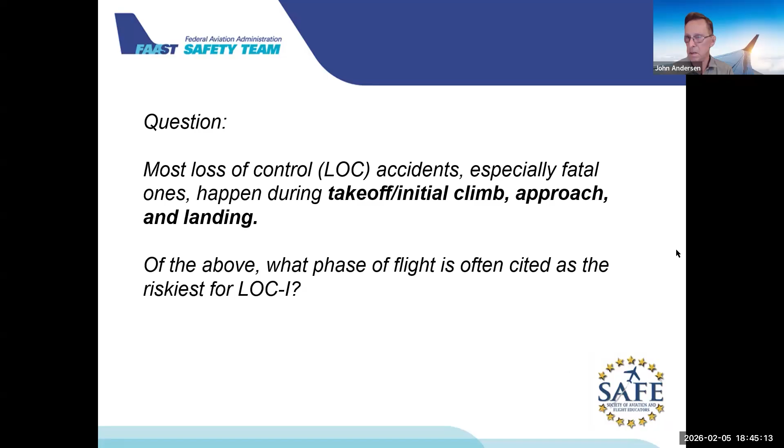Most loss of control accidents, especially fatal ones, happen during takeoff and initial climb, with takeoff climb being cited as the riskiest. So pretty much I see takeoff, initial climb. So pretty much everybody's kind of in line with that. And that's, of course, what happened with that particular King Air incident and most of them that have occurred.

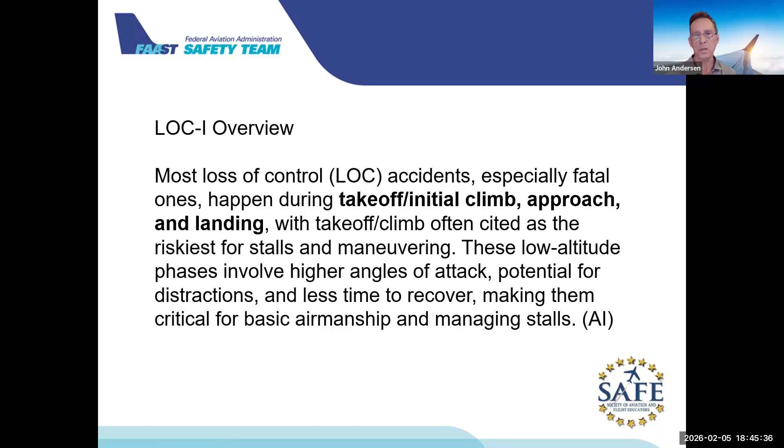So this is from the original Joint Steering Committee. This is data about LOCI. It's pretty neat information when you have a lot of time to look at it down the road. But basically, most loss of control accidents, obviously we have about 1200. Now remember that this is fatal accidents. This is not all accidents. This is just fatal. But the preponderance obviously are non-home built.

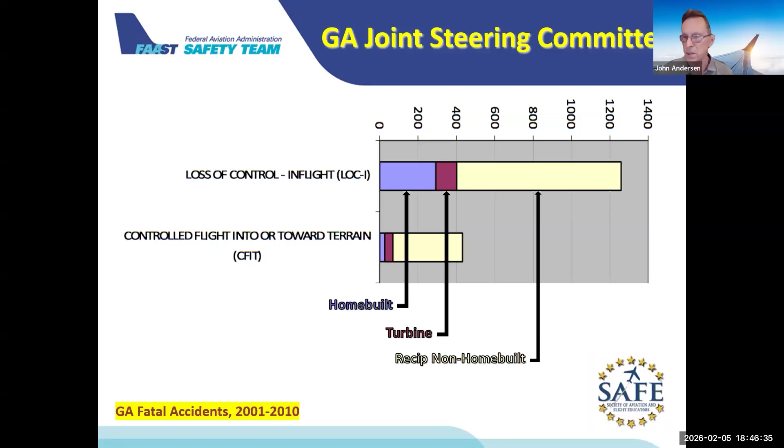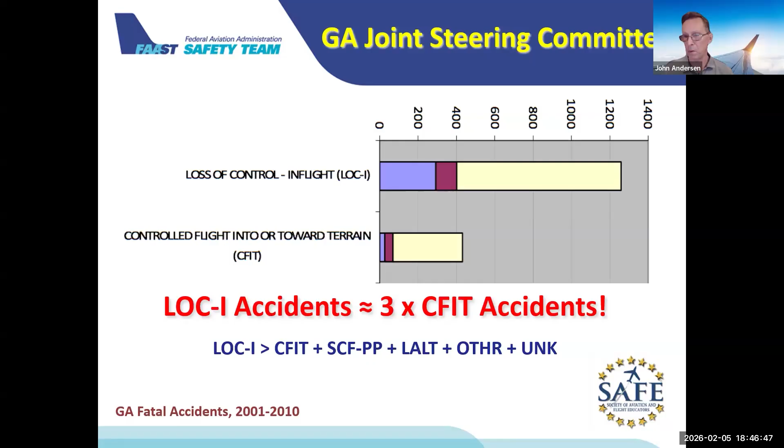The home built are a percentage, and it's interesting, but turbine are in there too, because that's general aviation, so they're included in that. When you look at that compared with CFIT, I mean, it's 3 times what we get with CFIT. And that's from 2001 to 2010. So that data is a little bit old. I have newer data, it hasn't changed much. It's still basically the same percentages. LOCI is 3 times the CFIT accidents. It's greater than really CFIT, I mean, all of the rest combined.

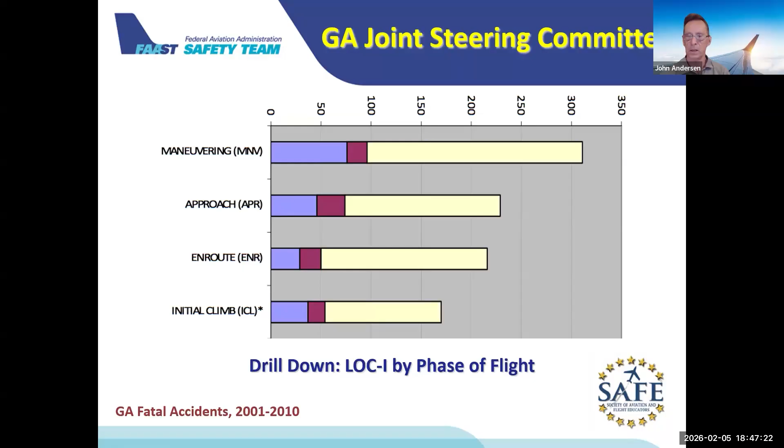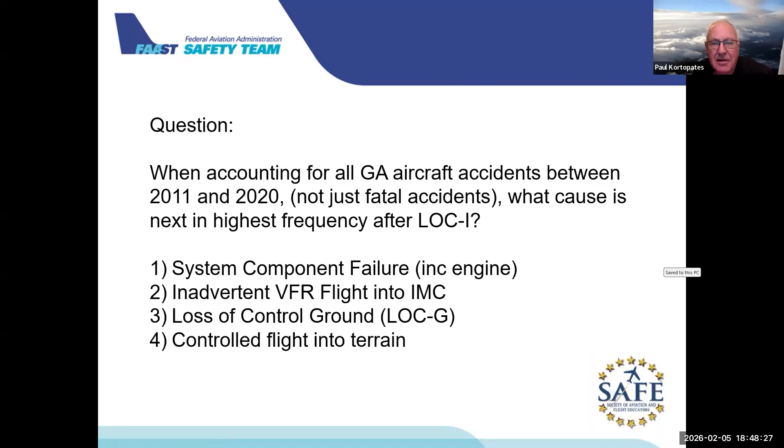So here is the 2011 to 2020 all GA aircraft accidents by defining event from the NTSB. Loss of control is still number one. It's also almost 50% fatal. The number two is loss of control on ground, which is kind of a head scratcher for me. But I guess they separate whether or not this is a landing or takeoff incident. The next one is system or component failure, power plant or whatever have you. Then there's abnormal runway contact. Then you come down to fuel related. Then there's system component non-power plant, controlled flight into terrain, and so on.

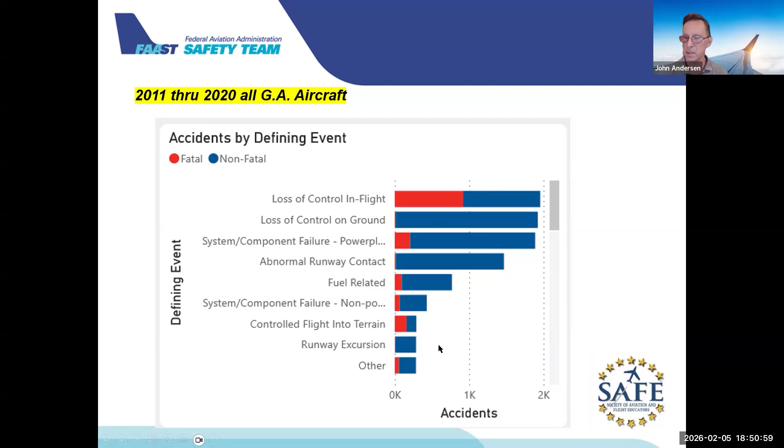So you can see loss of control in flight, that's the highest fatality period there is. But from a percentage standpoint, if you just look down, controlled flight into terrain by percentage of incidents is the highest fatality rate in terms of percentages, but obviously not in numbers. So LOC, that's a big problem, along with LOC ground. Thank goodness it doesn't tend to be fatal. All right.

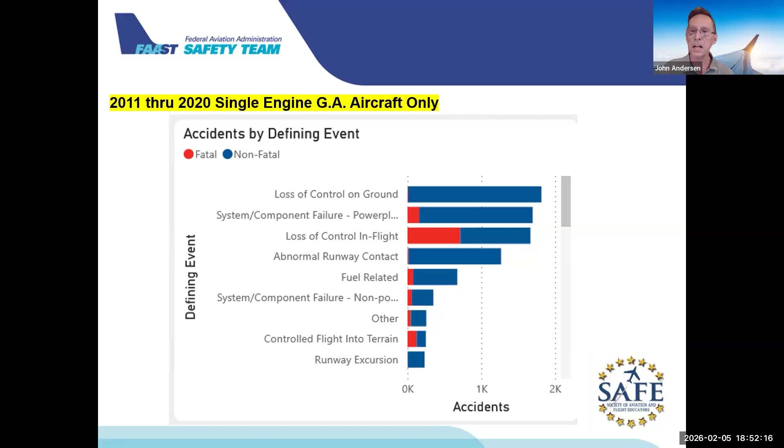John, we got a couple of questions. Maybe now would be a good time. Can you handle that? Can you put those guys on here? I can read them to you. They're in the chat. Oh, here we go.

The most recent question is: are inadvertent IMC embedded in the loss of control in flight numbers? That is a great question. I suspect it might be. I don't know—LOC, yeah, that would be VFR flight into IMC.

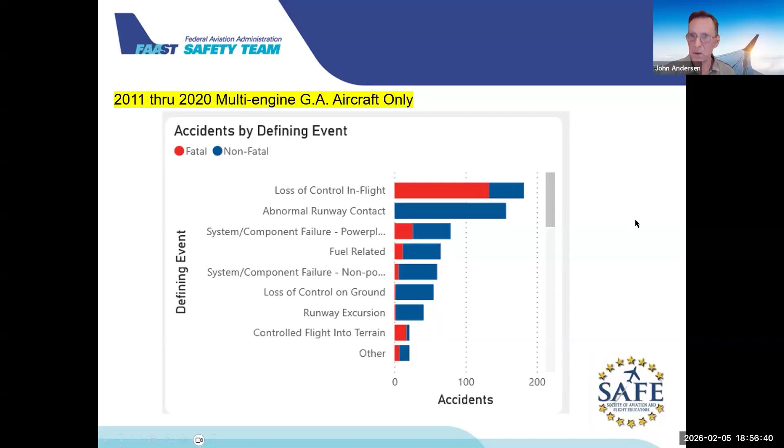Anyway, so that's multi-engine, so we obviously have an issue there. We got another question—okay, slide 16, I think. So we're talking flight training now. We're not talking GA, not talking any of that, us going out—we're just talking flight training. What is the number one risk during flight training?

Hey, we got a quarter of the folks have answered... okay, a little more than half now... two-thirds.

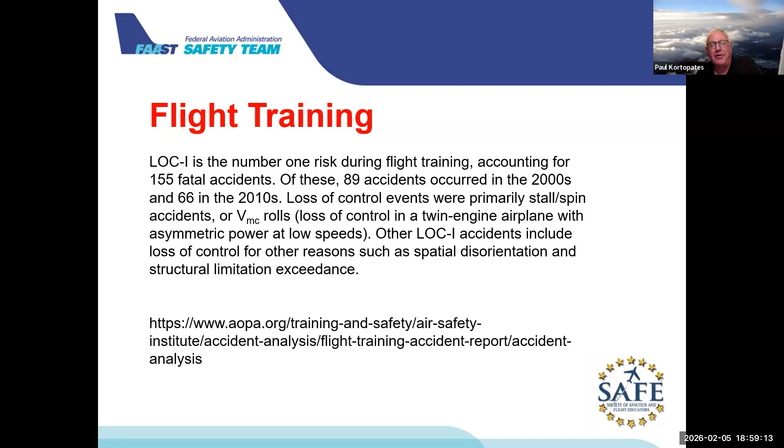Oh, BC says the biggest risk is running out of money. And the second largest is needing to use the restroom during the flight. As a King Air guy, I have to agree with that — getting into that thing is crazy tight, and you don't even want to get up during a flight. That's funny, whoever put that, I sympathize. I hope somebody didn't have a mechanical failure earlier in their training that's got them worried about that being the number one issue. But yeah, I'll stop sharing that.

AOPA Air Safety had some neat stuff here — LOCI categories, fatal flight training report 2000 to 2019. This is a 20-year look, and obviously stall spin is really number one. It's a VMC roll — there were 12 incidents, and other was 21, for a total of 155.

When we get to talking a little bit about prevention, I'm going to ask a couple things here, people, because I just know that in my day — I don't want to sound like somebody's dad — but in my day I'd take a 150 up and spin that thing down from 6,000 feet to 2,000, go up again and spin it down, go up again. I'd take people for a ride, I'd say 'you want to go first? Down.' I never understood it being a big issue, and I was never even close in the pattern. Never. I don't get it, but it's an issue.

Another question — okay, this would be slide 19. Yep, okay, it's launched there.

So we're going to drill into a little more detail. Of those 155 LOCI fatal accidents, what topics were 25 or more accidents? Emergency, maneuvering, takeoff, go, or all the above?

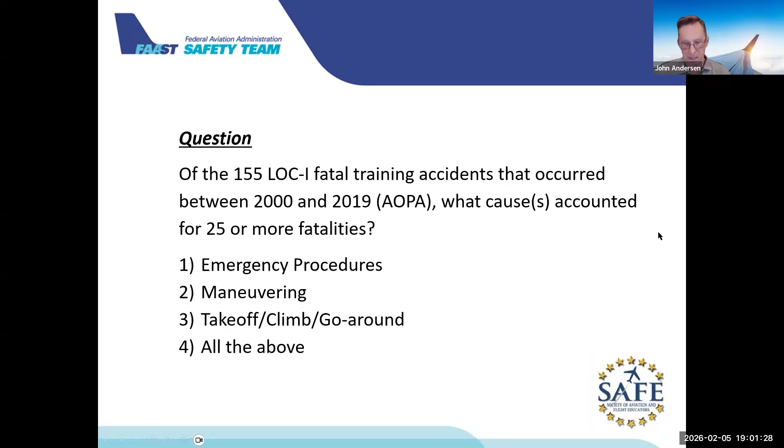Let's see if we can — there's the chart from AOPA for the 20-year period. Basically, all of the above — they're all a problem, with takeoff and climb being the preponderance at 48. But look at maneuvering, 45, emergency procedures, 26.

Oh yeah, man, we still have stall spin issues. So it looks to me, it's interesting — intentional stall spin is only 12, and then downwind base. I'm going to be curious what some of you say about that, here in just a bit.

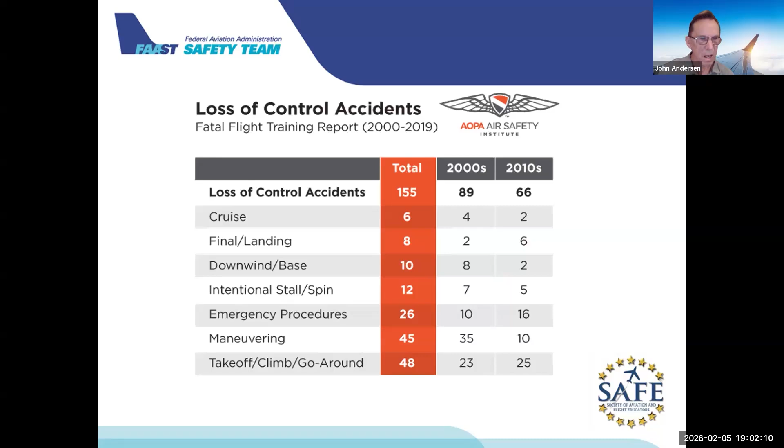Okay, this is the loss of control working group. This is what they came up with in '14 — the concerns that, because their job is to mitigate this, that's what we're trying to do here.

And I'm going to tell you what I do with multi-engine training, and I want to hear what everybody here is doing if they have any neat techniques. But first we're going to talk about transition training — the working group felt we needed more thorough transition training, and type clubs.

Stabilized approaches and landings need strengthening. Risk-based flight reviews — I take that to mean defined performance and getting through them, maybe a little more scrutiny.

Single pilot CRM, that's an interesting one — we'll hit on it, and I'm curious what everybody says. Aeronautical decision making is obviously a big, big deal. And angle of attack systems is interesting.

So when we get to that, I have something I've added in, because Beechcraft, for example, is very keen on the fact that a lot of their airplanes wind up in VMC loss of control in flight. They will never tell you what they're doing — they just make subtle changes, there's just too much liability, whatever. So they make subtle changes directed at trying to mitigate that. And we'll cover that. So here we go.

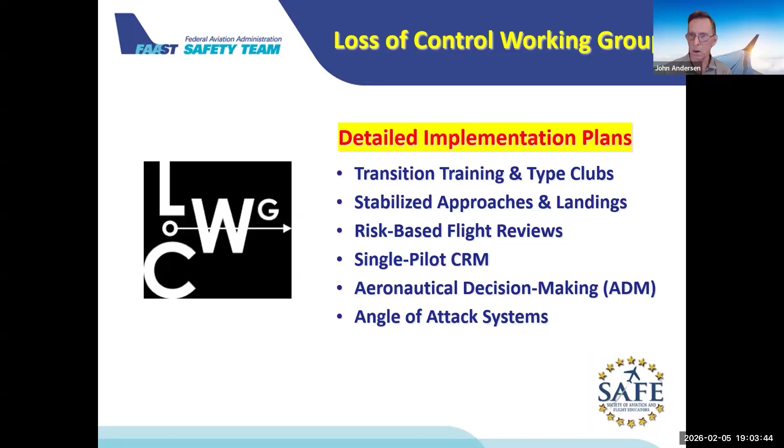I've flown with Andy and he's really good. In fact, I think Andy, you were the guy that helped me, quite a few years ago, back when you were the chief CFI, when I foolishly let my flight instructor rating lapse and had to get a check ride. Don't ever do that. That is the hardest thing, the hardest rating in the world. Anyway, Andy got me tuned up for that.

Andy, is there a way you can jump in here? Before we go through all these points, can you give the group your thoughts from a standpoint of a philosophy of Prevectus with your instructors in terms of what's in your head going out? Is LOCI like a number one concern, and is it in every phase of training?

What do you think? Yeah, definitely. Thanks, Doc, and thanks for putting this together. This is awesome, and I think definitely a heavy hitting topic that requires some good attention. So thank you. Yeah, in terms of loss of control in flight, absolutely, I think in the training environment it definitely is at the heart of what we do and should be.

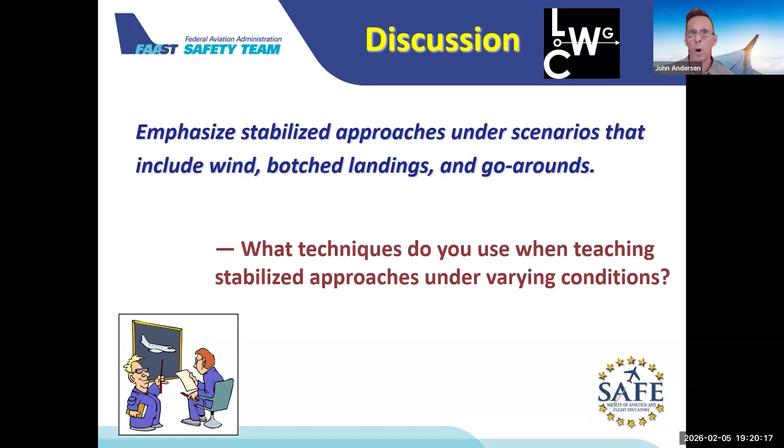Trying to think of an example besides noise. I mean, I think this is interesting because when I do a flight review, sometimes I'm just trying to keep it normal because they're so rusty. Some of the last things I want to do is introduce a problem.

Which - so this is a dicey one, you've got to be careful. I think this is stuff for the simulators, like Andy talked about, in my mind. But any thoughts, Andy, before I go on to the next?

Yeah, I think a kind of pitfall is if someone's flying a twin or they're multi-rated, they might do their flight review in a single and miss out on some multi-engine training that I think is very important. The single's the cheaper route to get your flight review done, but might not be the safe route. I think recurrent training on multi-engine procedures, if you're going to be flying them, is important to be considerate of.

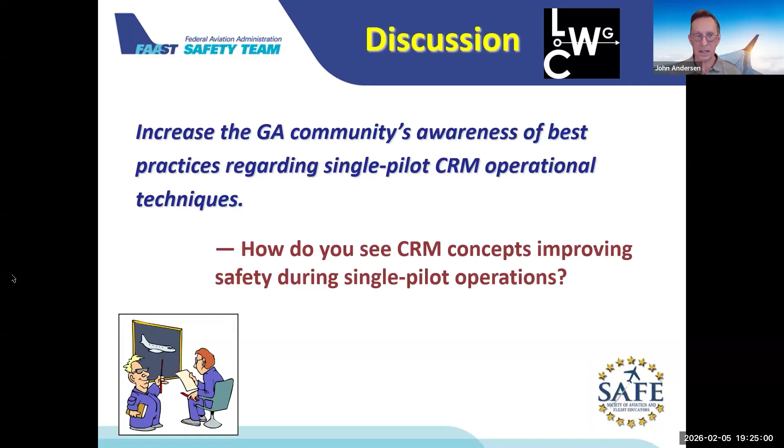Now let's see. I think we talked about that. Focus on aeronautical decision making, pre-flight planning, and the use of flight risk assessment tools. I've seen them. Is anybody using them besides the Civil Air Patrol? FRATs? Not a whole lot. Go ahead, Andy. A FRAT, John? That's what you're asking? Yeah, anyone using those? I think there might be one here. No, they don't have it.

But yeah, every flight, our students are supposed to be using a FRAT. Before every solo, we'll file it away and make sure it was completed. So solo pilots always do it, and it's supposed to be for every dual flight as well, because most of it is in the PAVE checklist. It's great because it makes sure they're getting all aspects of PAVE in before they go fly.

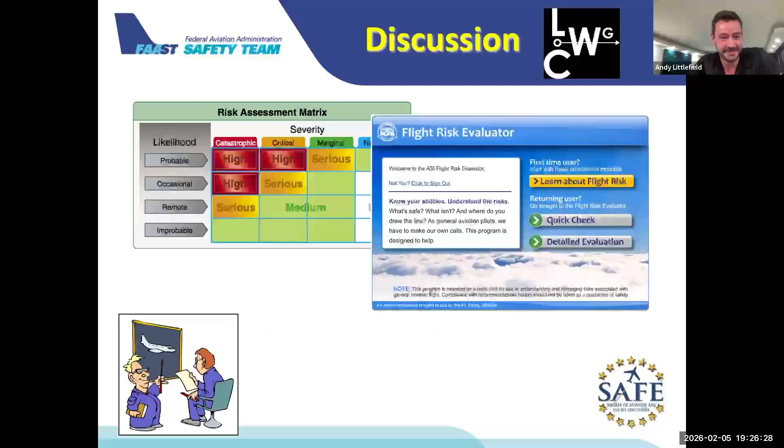But risk management should be introduced day one and embedded into every single lesson. I constantly tell all of our pilots, flying an airplane's easy. Your job is to manage risk. That's what you're there for. Well stated. FRATs are huge. I'm a big proponent of those. Everybody ought to be doing them. Well, I suspect I'm going to get to see yours real soon. You will. They did put a couple things in here. I don't want to spend time on this, but I like your thoughts that primacy early on is really important.

Does it become a distraction? Well, yeah, when they're staring at it, that becomes their pitch instrument as opposed to looking outside and managing their airspeed. So it can become a distraction. But I think the basic concepts are helpful at an early stage, and then when you get guys in a jet during a circling approach, hopefully they start watching their AOA, even if they're new, because they've had some exposure to it.

But we don't have a lot of them, unfortunately. Okay, I'll move on here. They're important, yeah. I have it in my aircraft. They're great. They threw this in here, folks. We're going to just kind of move through it, but

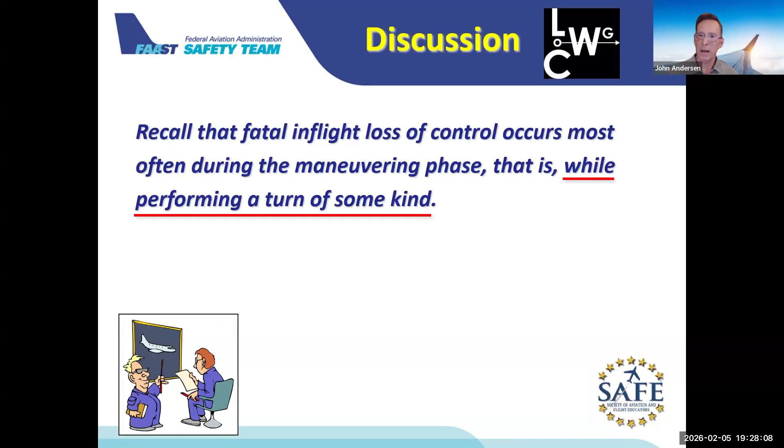we kind of know that's the maneuvering phase while performing some kind of turn. And so there is a question in here. I think this is the last of the questions. Okay, we'll launch that, 874. Pilots were asked, what's the primary control surface you use for turning an airplane? I consider this a little bit of a trick question. It is, yeah, but it's a really good one, because we use everything, in a way. But what does everybody say here? What say ye?

Well, that's as much pirate as you're going to get out of me today.

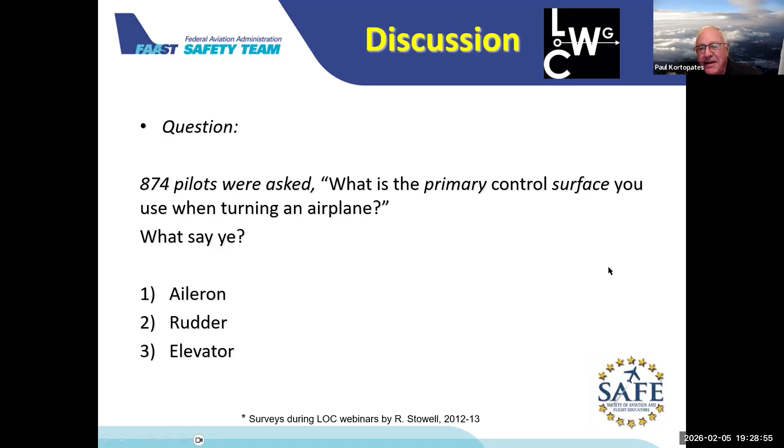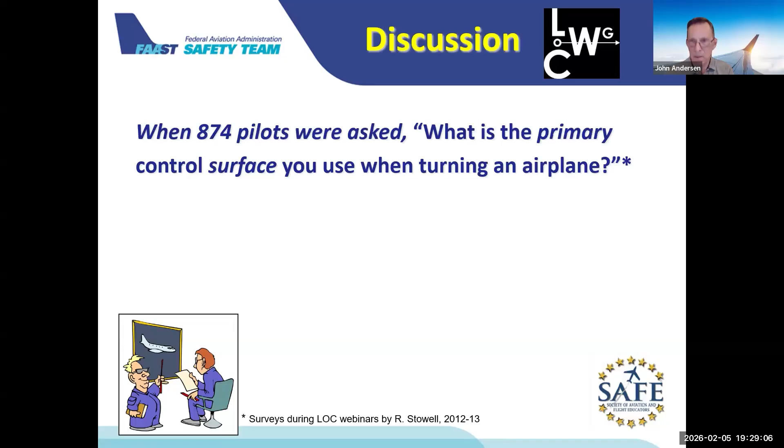So we are 42% into it. And right now the rudder is winning out. We're at 60%, 64%, 18 out of 28, we got left. Okay, let's give it a go. I'm going to end the 874 poll. Pilots were asked what's the primary control surface. That was across the board. 63% responded aileron, 23 responded rudder, 14 responded elevator.

Again, I consider this a trick question, but the Airplane Flying Handbook states the elevator moves the nose of the airplane up or down in relation to the pilot, perpendicular to the wings. Doing that both sets the pitch attitude in the turn and pulls the nose of the airplane around the turn. So they're stating it's elevator here, but I would tell you we initiate the bank with aileron, we pull through with the elevator, and we coordinate with rudder. So I think this is more of a word thing, about how we train people. Okay.

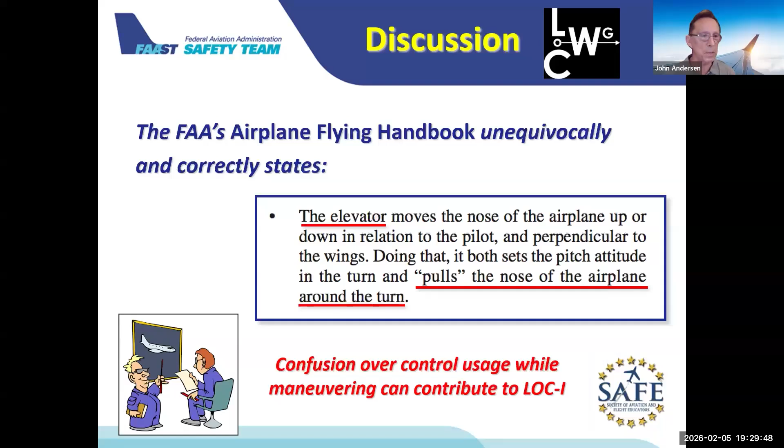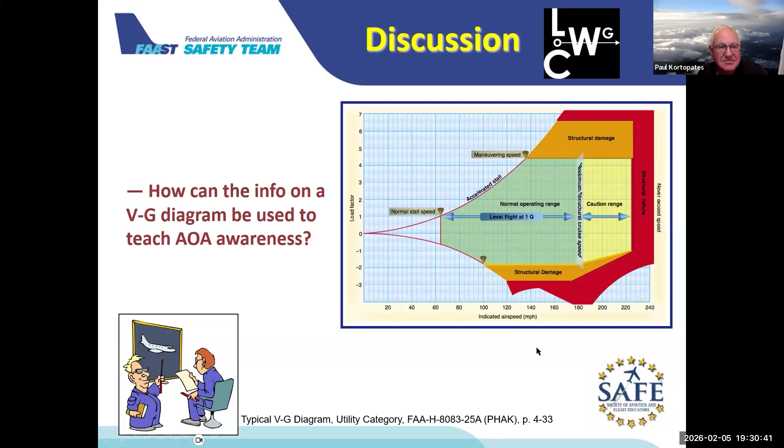So look, we talked about angle of attack. I didn't rearrange it, it's a little disjointed here. And we've seen these various angle of attack indicators. I'm going to add something in here. So Andy, you guys have one of those in, what, 9-1 X-ray or something? Yep. Do you train its use or do you just kind of let people figure it out?

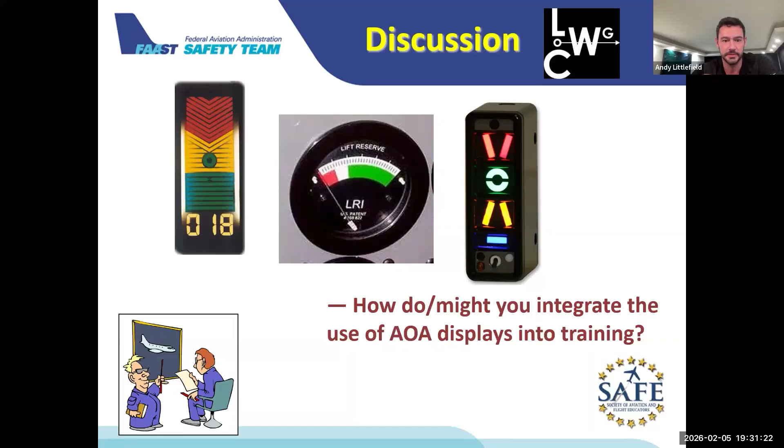Oh no, we train to use it. Any equipment in the aircraft, people ought to know how to use it. So we'll get them into the manual and show them. We'll do a demo right at altitude, what it looks like if we're high AOA, low AOA, or on the meatball, and then coming into land, they can reference that. Okay, yeah.

So look, I threw this in here. Does anybody integrate the use of a flight director at this point? Obviously in primary training, maybe not, but in instrument training, I've seen more and more airplanes with flight directors. I fly with people that have them that never turn them on. The reason I brought up flight director is this is an excellent pitch limit indicator for multi-engine airplanes. In fact, I integrate a flight director into my training because

all of these King Air accidents, these VMC rollovers, every one ends the same. The gear is down, the speed is between 85 and 88, and they're at 14 to 15 degrees nose up. Every one of them. It all ends the same. And why are we at 14 degrees with an engine pulled back? We're not an F-15. We need to be a max of 8 to 10. So I train the use of a flight director as a pitch limit. Typically, I have the guy go around on their flight director, it pops in about 7, 8 degrees, works really good.

If you're flying a big bad King Air, you could probably go to 10. But if you don't exceed that and you lose an engine, you're probably not going to VMC the airplane. So I'm not the only one doing that. I kind of started that on my own. But guess who's doing that now?

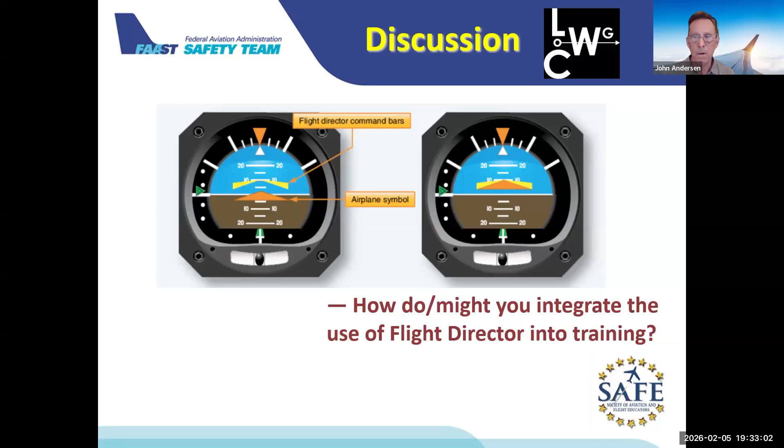I don't care if it's a Seminole, but typically it's power max allowable, airspeed maintain takeoff or above, gear up, prop lever, in this case, feather. Airspeed after obstacle clearance, best blue line. Okay, flaps up. Pretty boilerplate across any multi-engine airplane, could be an Apache.

If you go buy a new King Air, your engine failure after takeoff checklist has got a subtle change. It says rotate to 10 degrees. Now, some people would argue you've got to say max power, and I agree. So when I teach the airplane, I obviously teach 10 degrees max power, and so on. But Beechcraft has now, and it's not just on the 350, on some of their last production 90s, their high performance GTs, thrown in a pitch limit of 10.

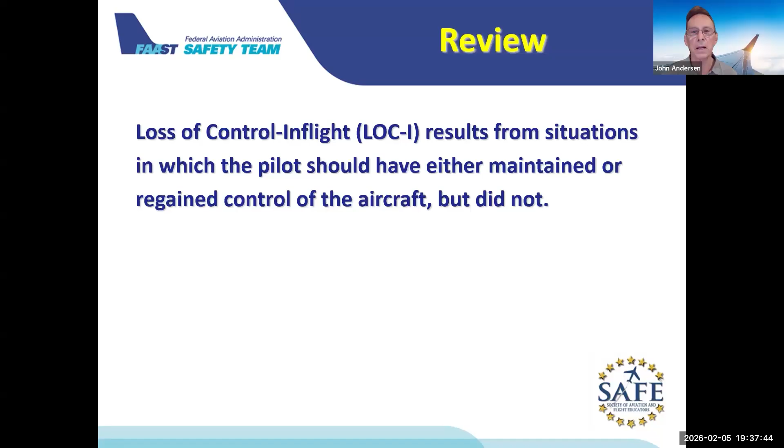I'll show some of these accidents and where they occurred and at what speed, and then people realize they all end the same way. So that's how I incorporate it in. I make people think pitch, pitch, pitch. It doesn't always help, and anyway, let's just run through this in review.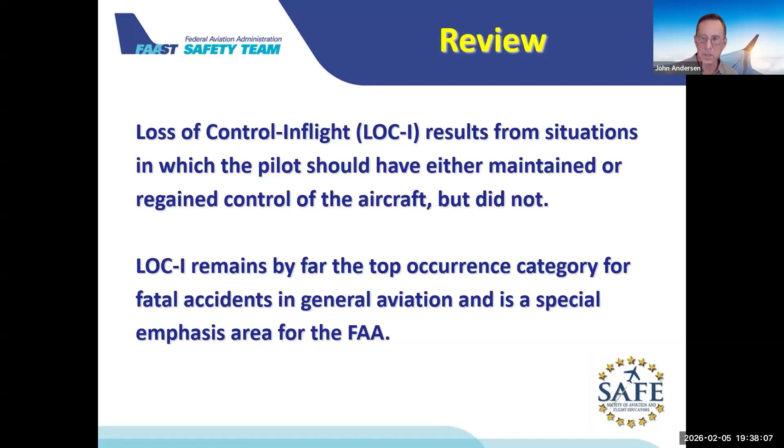Loss of control in flight results in situations in which the pilot should have either maintained or regained control of the aircraft, and did not. LOC-I remains by far the top occurrence category for fatal accidents. It's a special emphasis area, which is why we're here. The magnitude: obviously, maneuvering is a critical phase. Placing special emphasis on LOC-I awareness and prevention.

Any questions? Wow, you guys are easy. Okay, not everybody at once now. They're all stunned or asleep.

Well, while we're waiting for that first question, I'll tell you, I totally agree with you. I teach using the flight director for every takeoff with a go-around button. I think that's really awesome. I found it also really helps to combat somatogravic illusion. Pilots recognize that they have to have their eyes on the attitude indicator, but without something on the attitude indicator to focus on, they tend to not really use it with precision.

But I've had people, when we take off at nighttime or into low IMC conditions, who are no longer climbing the aircraft as soon as we get IMC. But you turn on that flight director pitch for the go-around, which is usually, as you said, right around 7.5 degrees. That gives them exactly what they need to focus on to keep the aircraft climbing. So I think it's a huge improvement.